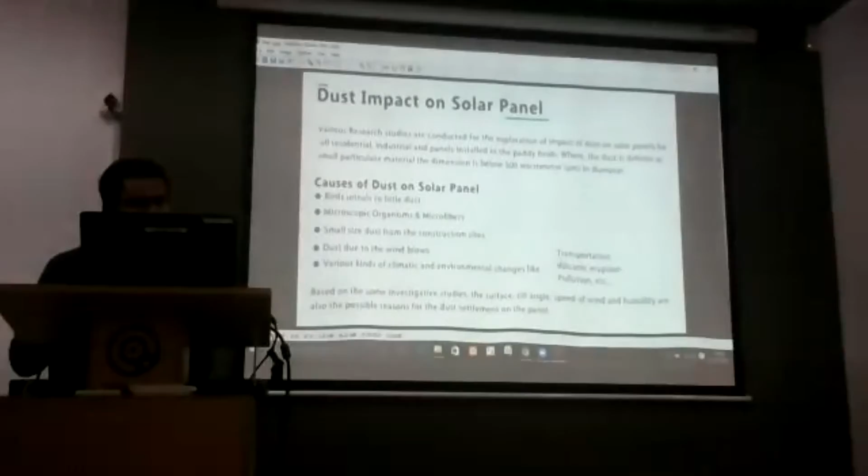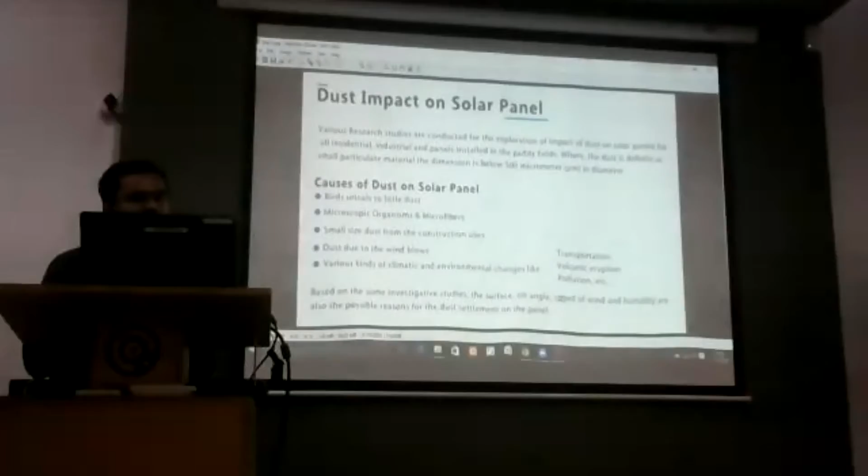These are some of the reasons for the impact on solar, like water sufficiency and transportation. As we all know, it's mostly about these needs. So the dust particles settle on the solar panels, creating a disturbance in the efficiency obtained from the solar panel.

In the proposed recent studies, I have seen the performance reduction due to dust elements, not only in India but in other countries too. In our country, in my state, it is from 3% to 7.6% over a span of 45 days. The efficiency reduction is similar in the United States at 4.7%, and in Saudi Arabia and some other countries along with us.

Simply, what I am telling you is that efficiency is the most important factor in solar panels. But due to dust accumulation on the solar panel, the efficiency gets reduced, resulting in less output, and the building cost is high. So this is the variable, and the previously existing systems are self-controlled systems, meaning there is only controlling.

In the proposed system, the solar panels will be cleaned by itself. Okay, so this is the existing system.

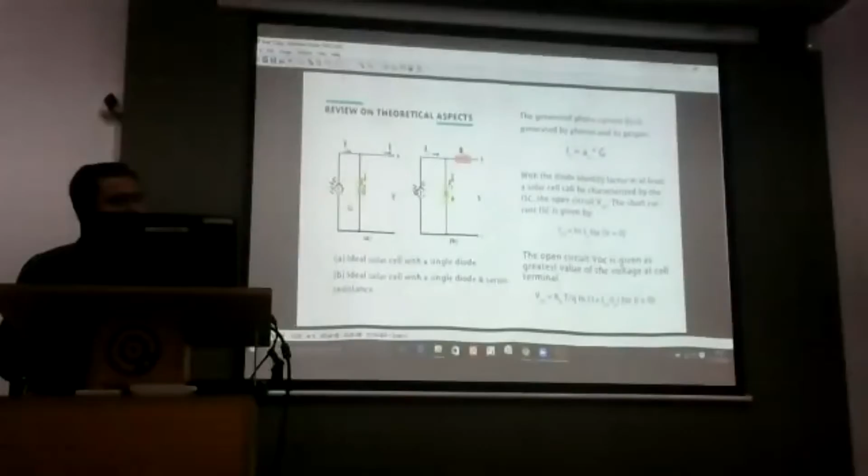So these are some theoretical aspects regarding that one: how the current and voltages will impact the panels, and how each cell will get the power. So that is regarding this point.

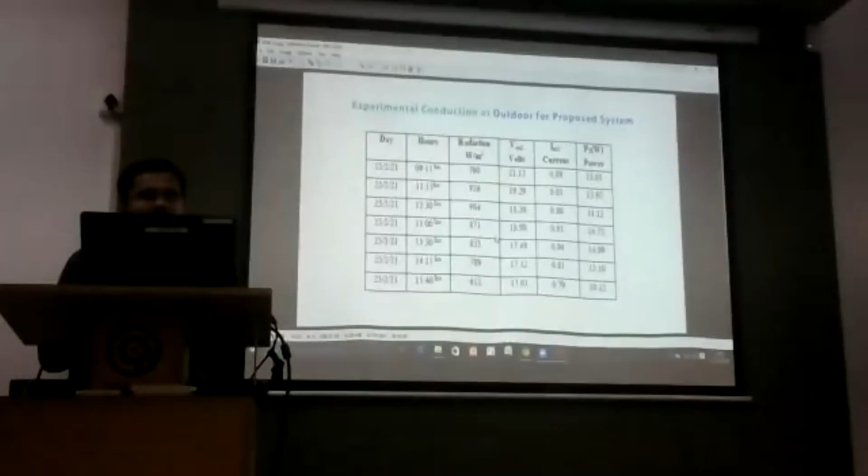Finally, we have studied this over 21 days. With existing systems, we have a power loss of 13.46, and the efficiency increased to 18 to 22% with our proposed system. So that is regarding the self-maintained solar panels as a basic one.

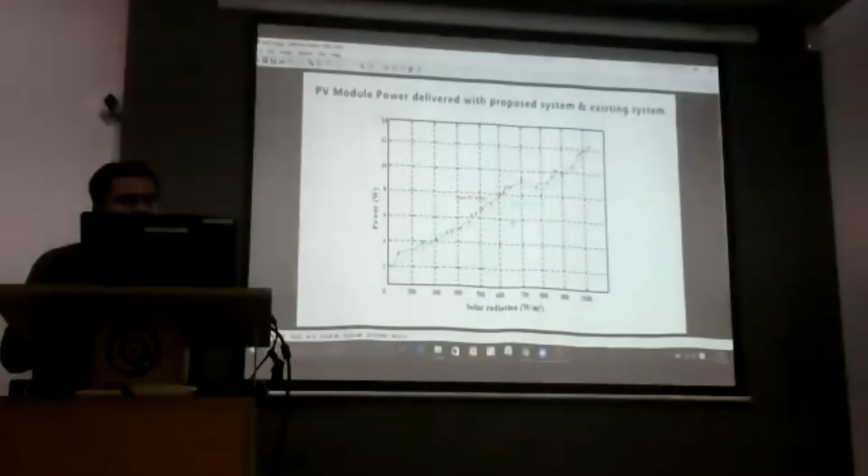This is the basic thing we have designed on our own, and the diagrams were also implemented by our team without copying from the internet. All of this is self-designed, and this is the final output we have come up with, and these are the final results we have got from the work.

This is... any doubts?

So this system is better than the conventional one. How did you make the comparison? Yes, sir.

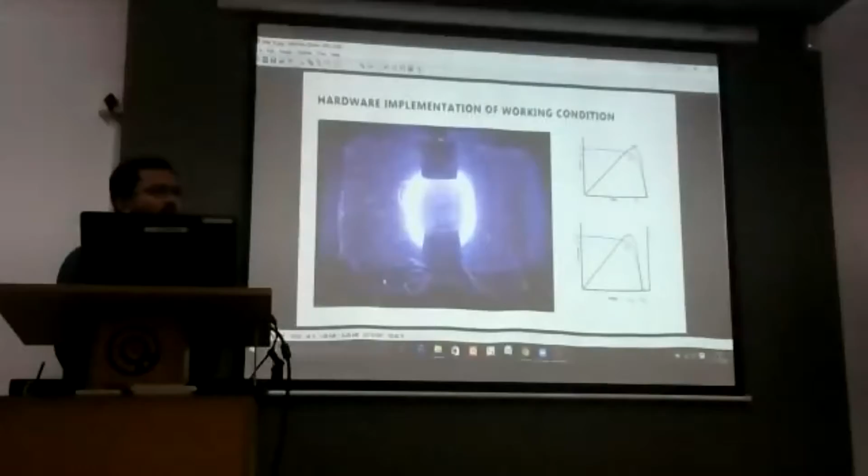We got it from 18% to 22%. That is the difference between the existing system and the proposed external system. We enhanced the efficiency, power, and current outputs. That simply means getting the maximum output from the solar panels, even across different parameters for solar and power. They are only related to the prototype, not solar directly.

What are the design parameters for this prototype? How did you design the motor? How did you select the motor? This prototype is very small due to the economic benefit.

This is a DC motor, 150 RPM, and this motor will be moved from this side. We did this using an Arduino prototype.

It is giving output for only certain days, and that will be affected by the impact of dust. I wrote the code based upon that — if the dust level crosses the limited threshold, then the slide will be moved from one end to the other.

How do you measure that, by looking at the efficiency or the intensity of the dust? Yeah, exactly, by efficiency — if the efficiency level decreases because of the dust only. So for example, if I run at 15% efficiency, and if that drops below 14.9 or 14.5, then the model will be moved.

We get that from the current and voltage system. That's why it gives mostly all those benefits. So obviously the efficiency will be disturbed because of building, wind, dust, and air.

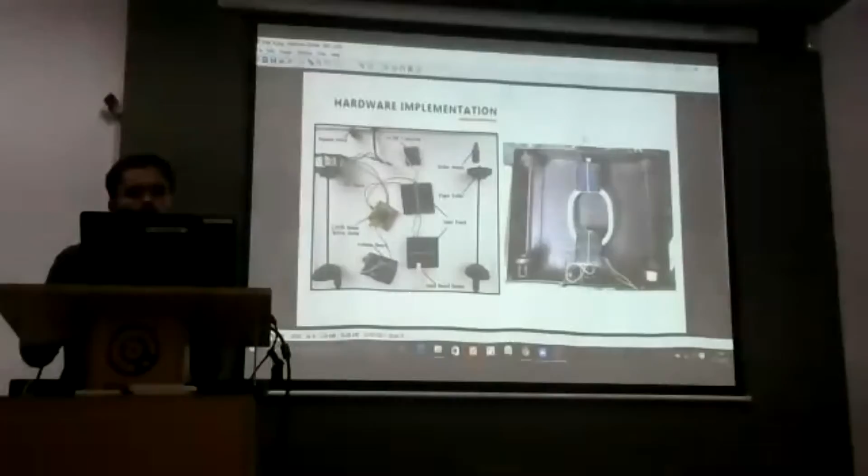By getting that alert, if we don't clean it, the system will get the alert and it will be cleaned from this side. But you need to hold this side and the other side, meaning to hold the covers. There is a sheet over it, so that's why we wrote that we have to cover the panel.

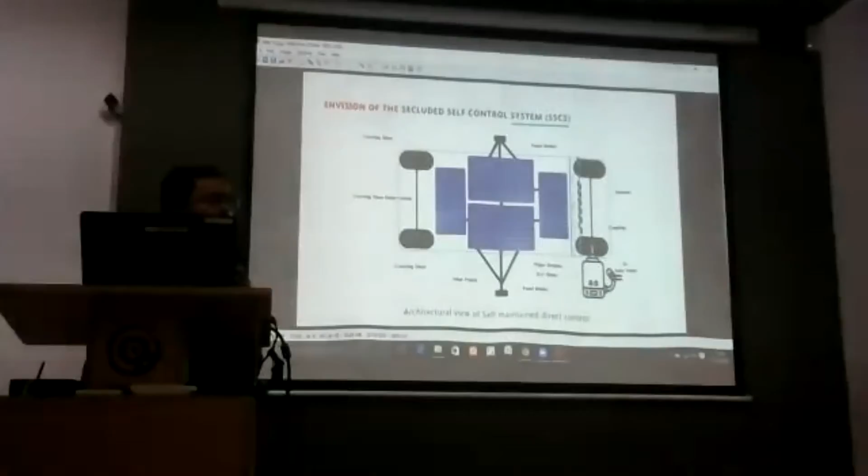And the wheel has to move itself. If we cover the panel, then the rod will move straight. We have the brushes here, sir, you can see here.

This will be rotated over, sir, from this angle to this angle. Meaning it's zero, and you take it as this angle, and it moves right to left and left to right. We are simply directing the motor directions.

That's it, and the cover is over there, and it will go from one end to the other. This is powered by the same solar panel — the power for the motor comes from the solar panel. Yes, sir, exactly, we can use that one.

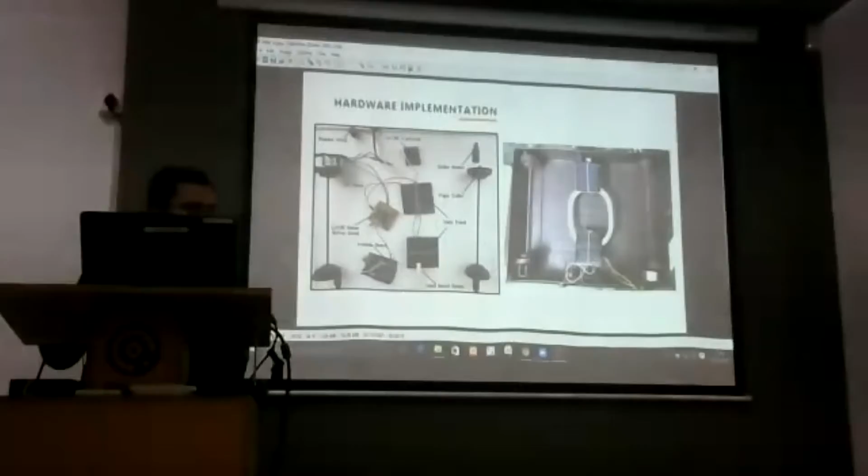Okay, so the power will be given to these motors. And this converter is used for the external motors, for irrigation purpose motors.

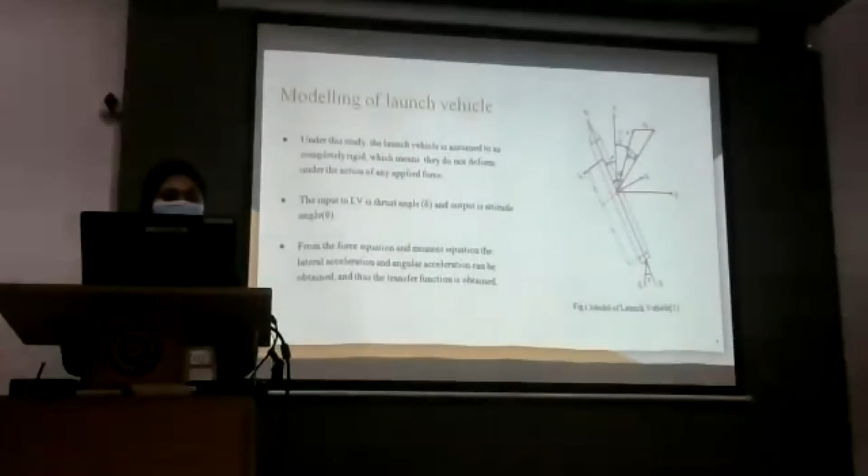The input to the launch vehicle is thrust angle delta, and the output is attitude angle. From the force equation and moment equation, the lateral acceleration and angular acceleration can be obtained, given in equation 1 and 2.

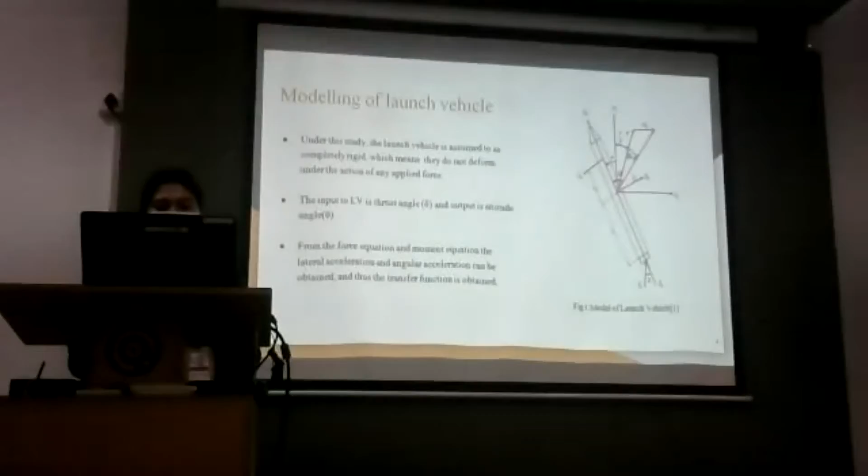From the figure, we can see that angle of attack alpha is theta plus z-dot by v plus alpha w. Then z-dot by v and alpha w are the components of the wind, and those components can be neglected, as given in equation 4.

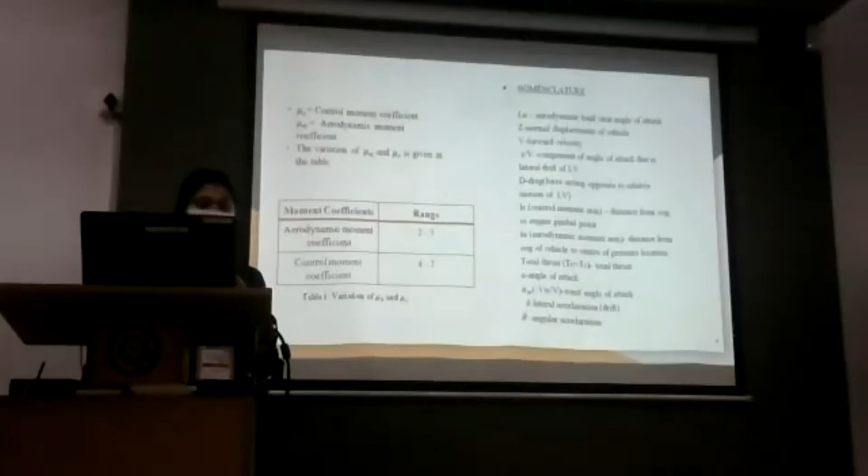Taking the Laplace transform and combining with equation 5, we get the transfer function of the system theta of s by delta, equal to mu c by s squared minus mu alpha, given in equation 7, where mu c is the control moment coefficient and mu alpha is the aerodynamic moment coefficient. The range of mu c and mu alpha is given in the table.

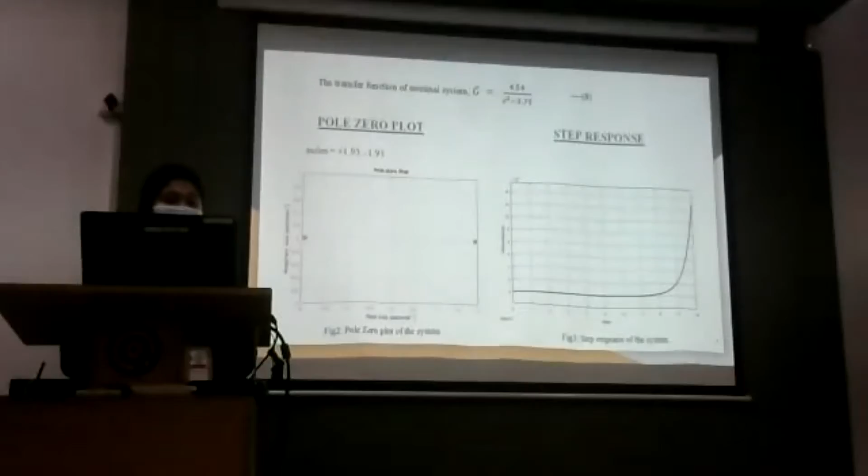Equation 8 shows the nominal transfer function of the nominal plant. Figure 2 and figure 3 represent the pole-zero plot and step response of the system. From the figure, we can see that our system is unstable.

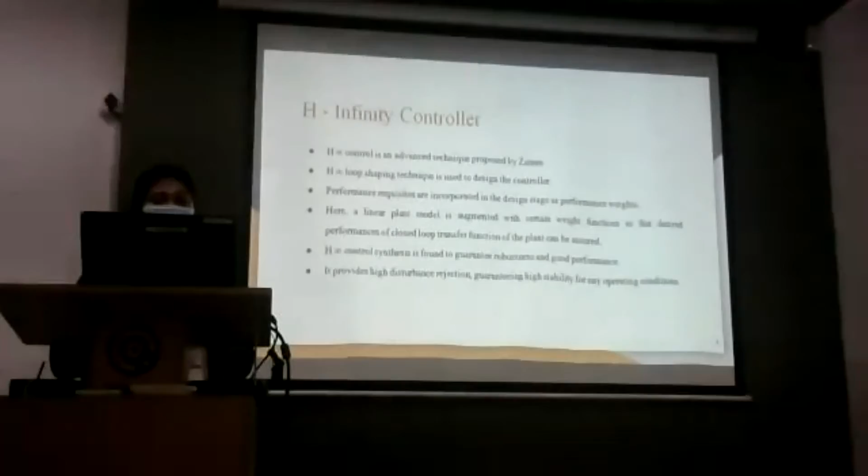So here we are designing an H-infinity controller. It is the most advanced technique and was proposed by Zames. Among different methods, we are using the H-infinity loop shaping technique for design. We are adding performance weight in the design stage to get our desired performance.

Coming to the design of the H-infinity controller, first we have obtained the plant transfer function. Next, we check the stability criteria as well as performance criteria.

The stability criteria states that the roots of the characteristic equation 1 plus G(s)K(s) equal to 0 should lie on the left half of the s-plane, and the performance criteria states that for all frequencies where the disturbance is high, our sensitivity function should be small.

Here we consider two transfer functions: one is our sensitivity function S and complementary sensitivity function T, given in equations 9 and 10. Our sensitivity function is the ratio of output to the disturbance, and the complementary sensitivity function is the ratio of output to our input.

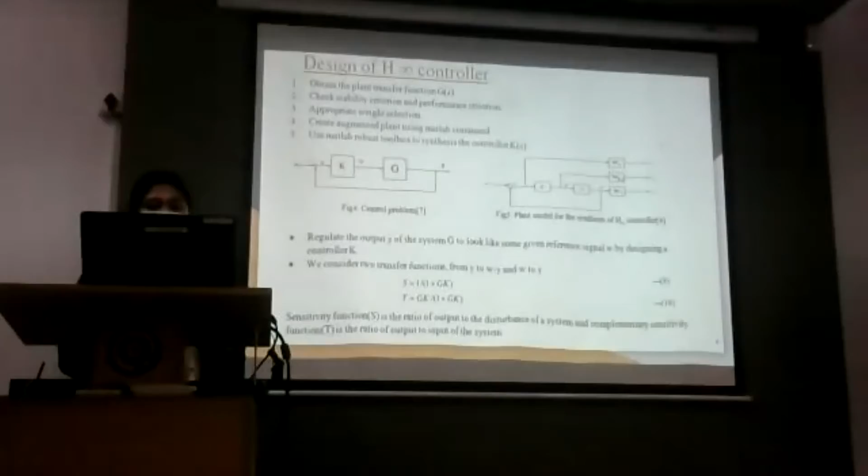Selection of the weight is the most important design in our project. Selection of weight for a robust controller is intended to reduce the H-infinity norm of the system. For that, we are introducing 3 weights to the system: WS, WKS and WT. WS is the performance weight, WT is the robustness weight, and WKS is the weight which is a constant.

It is used to limit our control. WS limits our sensitivity function and WT limits our complementary sensitivity function.

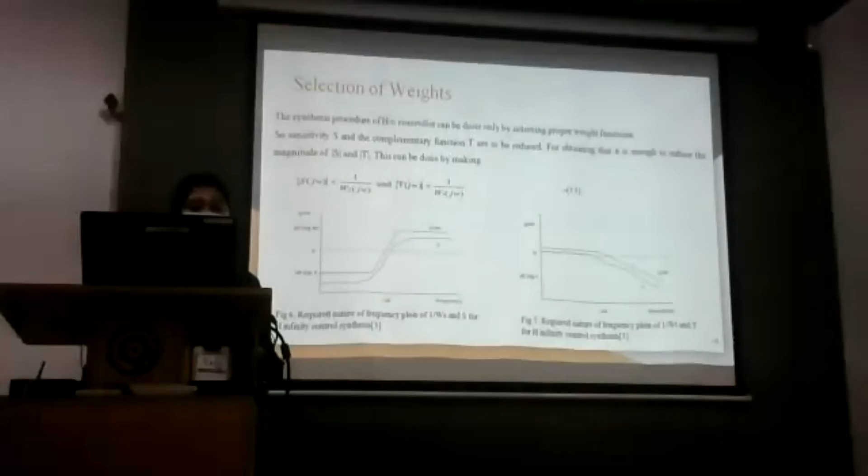For selecting the weights, there are no hard and fast rules. We are doing this by reducing our sensitivity function and complementary sensitivity function. To obtain this, we simply reduce the magnitude S and T such that it satisfies the equation 11. Figure 6 and figure 7 represent the graph, showing a graphical representation of the equation level.

The weight functions are nothing but lead-lag compensators, and equation 12 and 13 are the empirical formulas used to determine the weights.

As I said earlier, there are no hard and fast rules for finding the weights. Either we can use the trial and error method, or what we have done is the automatic weight selection algorithm, which is used for our given system.

The input to the algorithm was our plant transfer function, and we initialize the values of A, M, and L as 1, 0.1, and 0.0. Then we found out our WS and WT. Then, using the MATLAB command, we find the augmented plant P and the controller K.

Next, we have to check whether our cost function gamma is less than 1. If it is not less than 1, then we have to make necessary changes, adjust the values of A, M, and L, and repeat the previous steps.

If it is less than 1, then we have to check whether our equation 11 is satisfied, which is this. If these conditions are satisfied, then we tune our WKS, and lastly we get the optimum controller K of S.

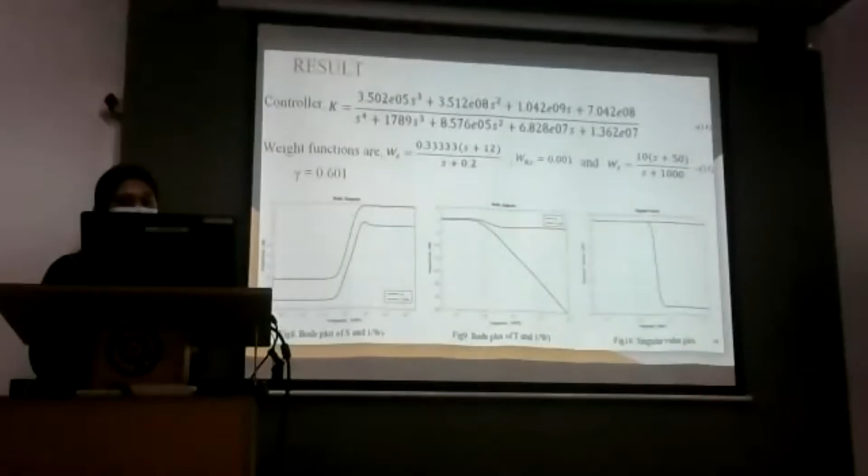Coming to the result part, equation 14 shows the transfer function of the controller, and equation 15 shows the weights that we obtained by doing the automatic weight selection algorithm.

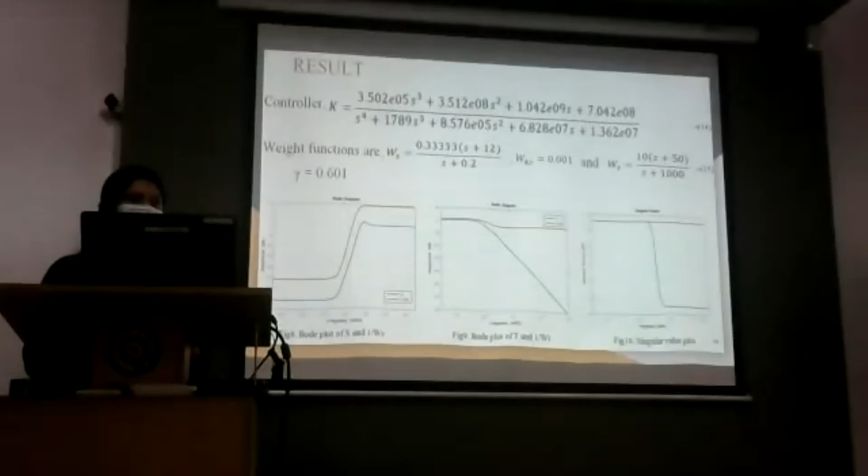Figure 8 and figure 9 show the Bode plot of S less than 1 by W and T less than 1 by W, which we can see satisfies our equation 11 and equation 10. Figure 10 shows a singular value plot of the system.

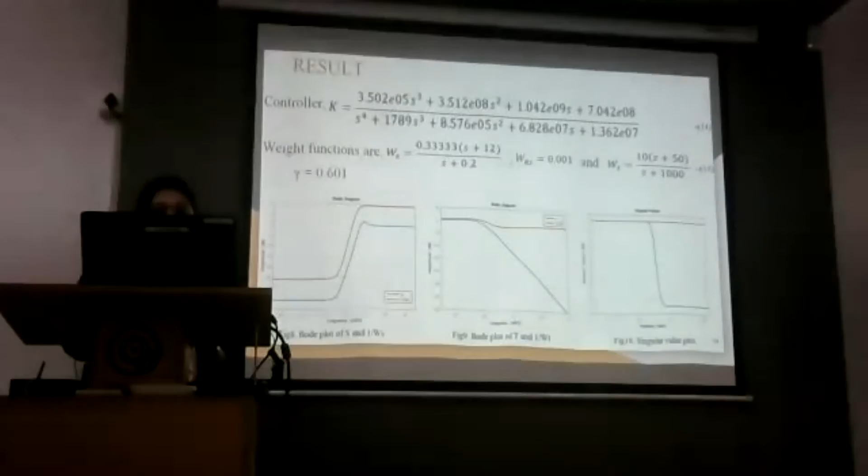The red line depicts the maximum singular value. So from the figure, we can say that all other singular values are below our maximum singular value.

Coming to the results, our main objective was to get a response with overshoot less than 25% and a rise time less than 1.5 seconds. Figure 11 shows the step response of the system with the controller, which satisfies our desired criteria.

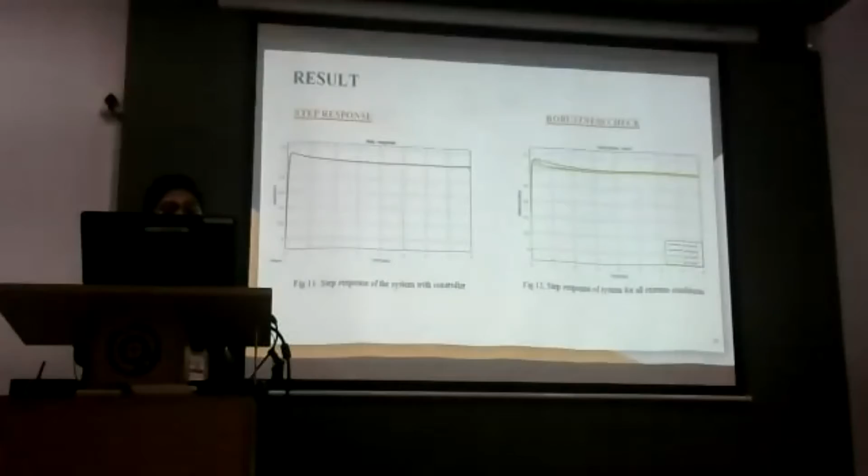Next, with the values of table 1, we have done the robustness check, and with all the 4 extreme limits also, we could say that our system with the controller was satisfied. Our result was satisfied.

So first we started with the rigid body dynamics of the launch vehicle, and we obtained the transfer function. From the pole-zero plot, we could see the system was unstable.

To stabilize the system, we introduced an H-infinity controller using the automatic weight selection algorithm, and also we did a robustness check and disturbance check. From the simulation results, our time domain specifications were met, and the disturbance rejection property of the H-infinity controller was good.

So your entire research is based on the assumption that the plant is linear. We are talking about a launch vehicle and how far it is close to reality.

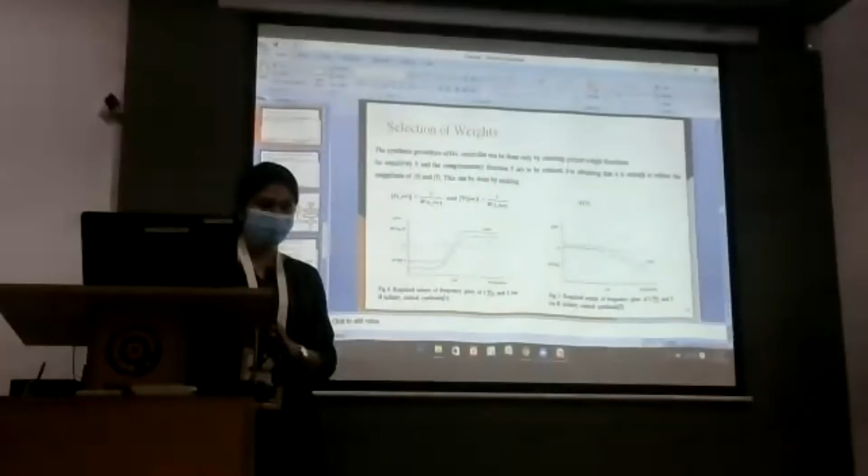So what is the M, A, and L? These are the variables in equations 12 and 13. M was a high frequency disturbance gain, A was a low frequency control system gain, and L was a constant. So what is the relevance of that high frequency disturbance and low frequency control system? Maybe the control system is really good, right?

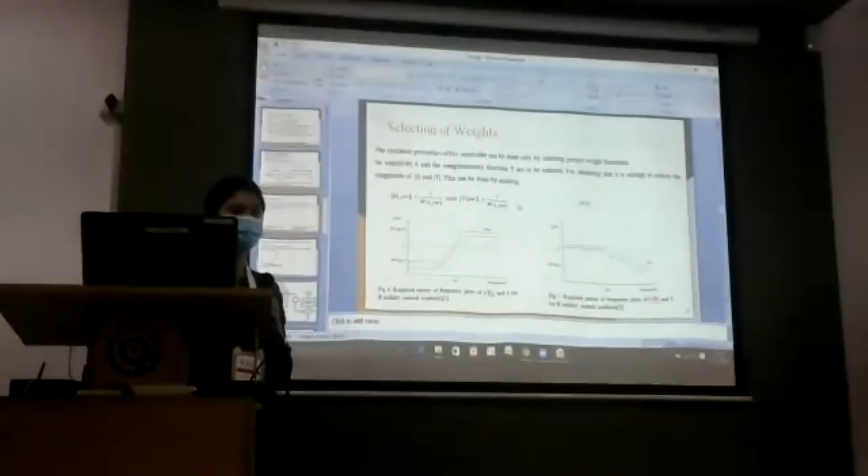Now, coming to the most important part of the discussion: robustness. What do you mean by robustness? Robustness says that not only for the nominal plant, but also for neighboring values, the controller would be stable and would attain our desired output.

Nearby values means, to be more specific, you might be putting delta M plus delta N. Here we have given the info using plus 2 to 5 and 4 to 7. These values are taken from the paper, so we just check whether in this range, if we put any of these values apart from the nominal one.

So you have considered the system parameters of yours. Have you not considered any disturbance? We only consider the coefficients, where we neglect all the other results like wind and other effects.

Because by classifying, you're obviously supposed to put the uncertainty part, right? Uncertainty part of your system dynamics. I didn't find that in your presentation, and if you do not have the uncertainty part, then how can you talk about robustness?

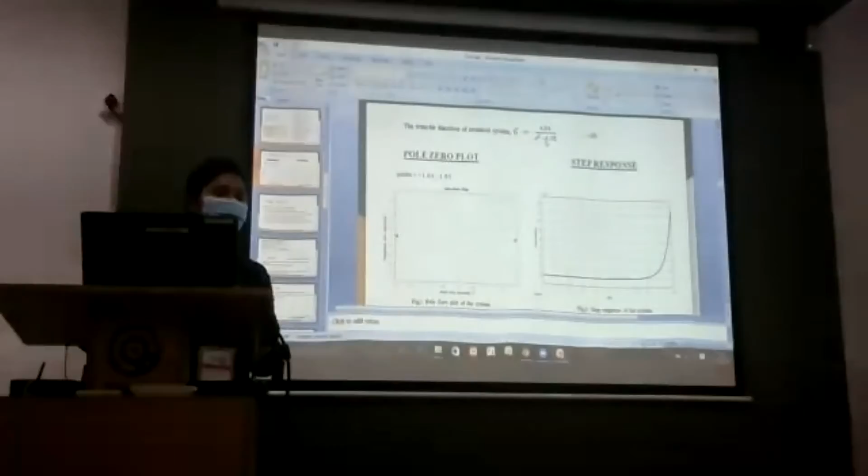These values they take from the paper, which most papers use as a nominal plant, so they also define the range.

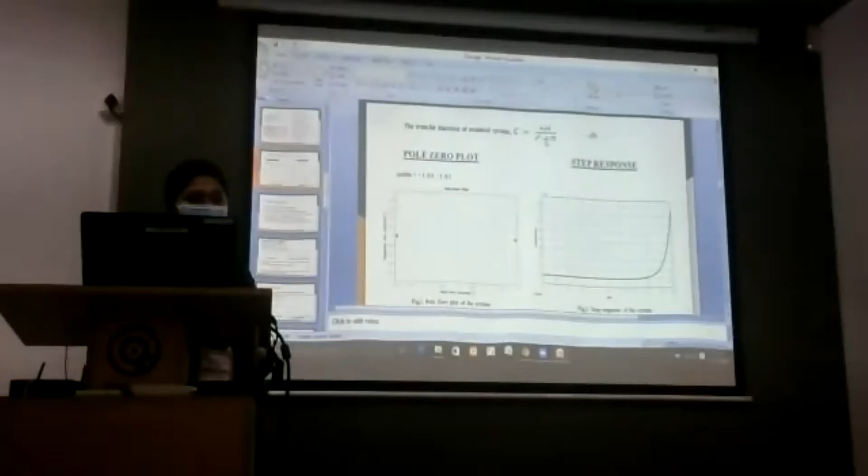So the nominal plant we took of these values, and we check whether you subtracted 2 from 4.54, how do you check the output? No, we just gave the extreme limits, 2, 5, 4, and 7, to get that.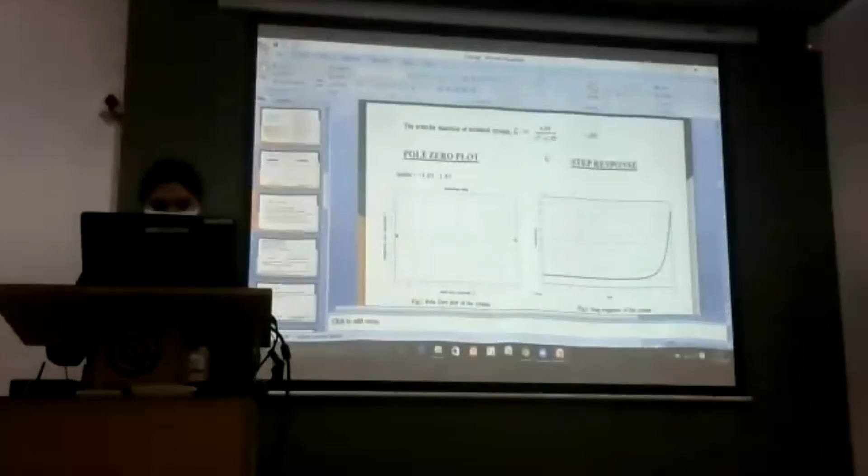So that is some disturbance signal, right? Yes, this one is a step response. First one is a step, and second one we have given... what do you mean step test? That is not step response. Initially your plant is settling around the point, and suddenly you are doing a step.

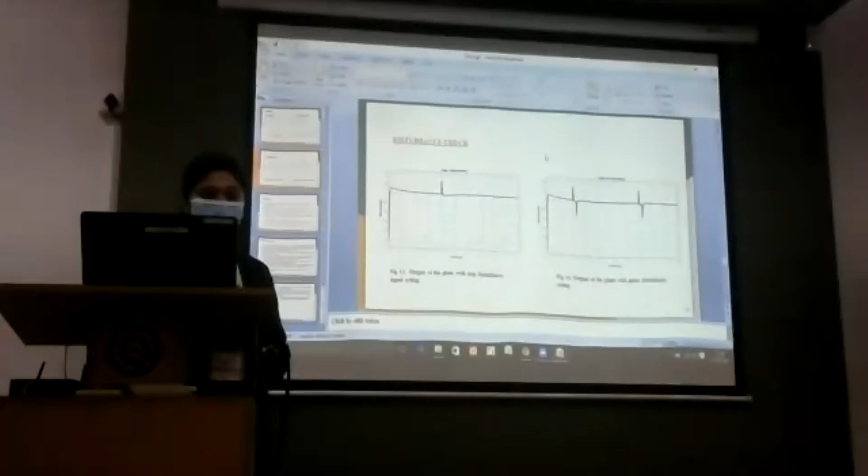So even a step of how much, 1.3? Yeah, the input plus our disturbance is 0.3, so 1.3. So the disturbance step means how much, 1.3? Suppose the same thing is going to be an impulse response of 0.3 magnitude. What modification will the picture have? Each is a step input, but you are giving an impulse input of the same magnitude. Yeah, you are giving an impulse disturbance. Right, but that is a disturbance.

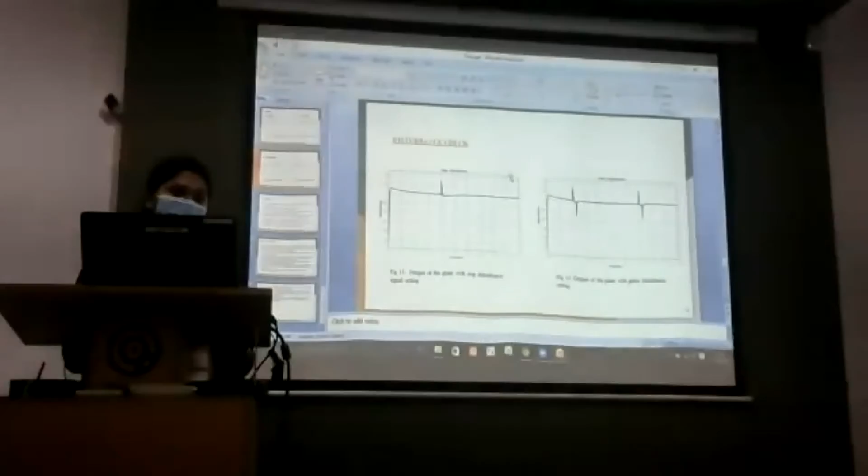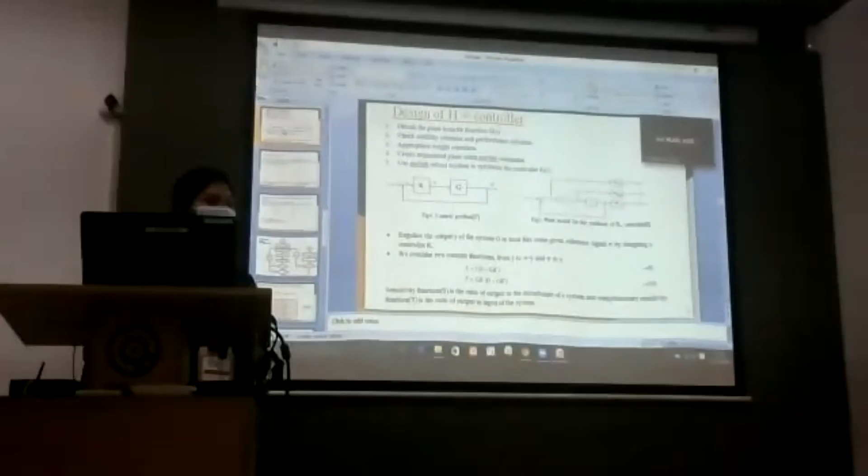Yeah, okay, then how did you arrive at the weighting function? In your design process, how did you arrive at the weighting functions? How did you choose the weighting functions? We did an automatic weight selection algorithm.

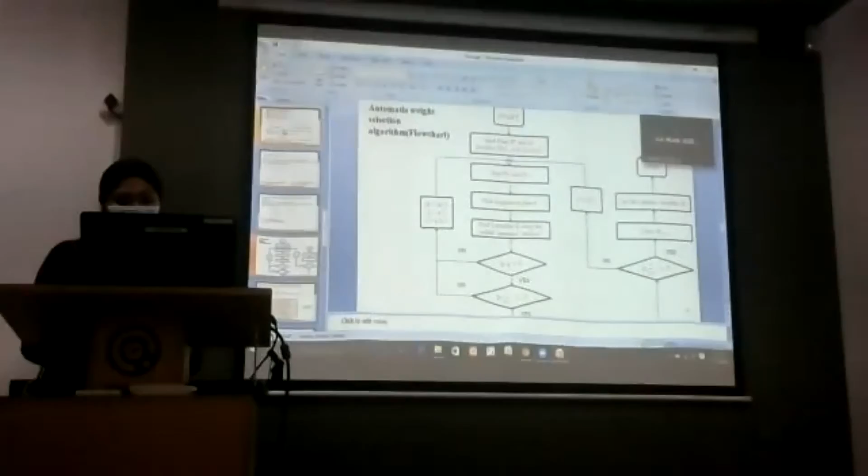Okay, and your controller is, I think, a fourth order controller you are using. Finally, you are arriving at a fourth order controller. Any plan for model order reduction? Yes, have you done that? Actually, no, we are getting a fourth order controller.

It's actually a small drawback of the H infinity controller too. Initially the plant order was 2, and we get a fourth order controller. But you can do the order reduction, right? Yes, the order can be reduced, using a hybrid controller I think we can reduce the order.

And any plan for the implementation of the H infinity controller? We are looking forward; we are all working, our team members are working, so if we get a chance, then we will implement it.

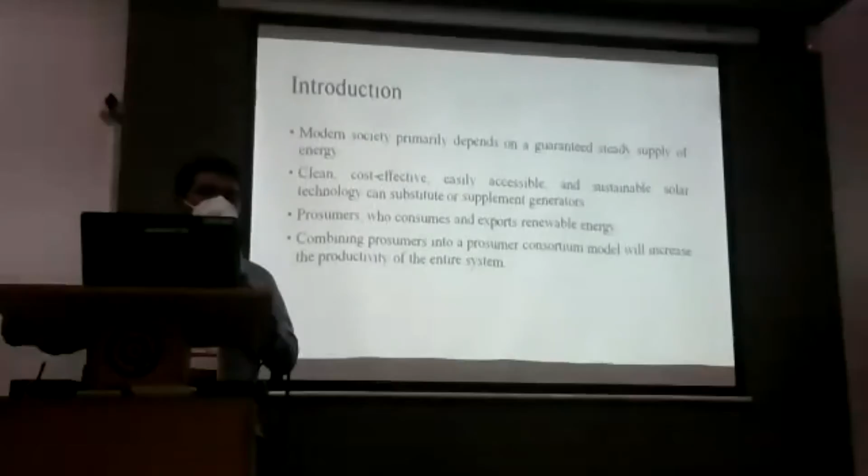Introduction: we all are in need of guarantee and secure power supply. We know that fossil fuels, which were used at a high percentage, are getting reduced these days, and we are depending on renewable energy resources. The most available renewable energy resource is solar and wind, and I am focusing on the solar case.

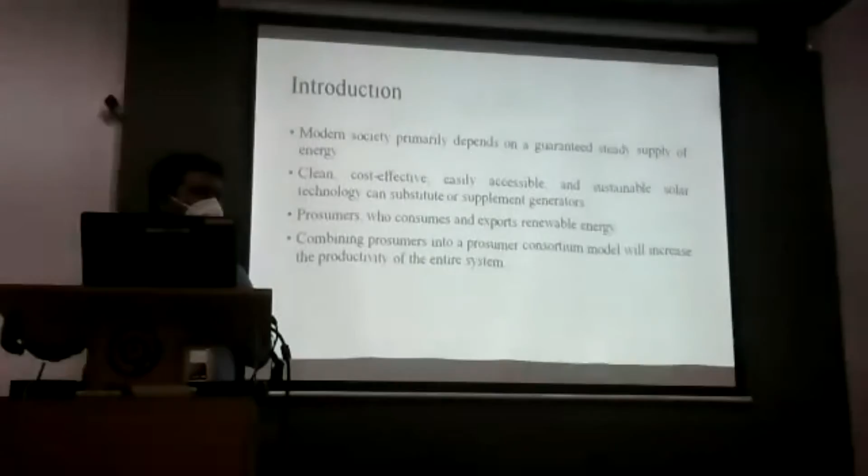While considering renewable energies, if a lot of people are using them, especially in the solar case, I am considering the prosumer. Prosumers are persons who produce and utilize energy, and they sell the energy either to the grid or to other persons.

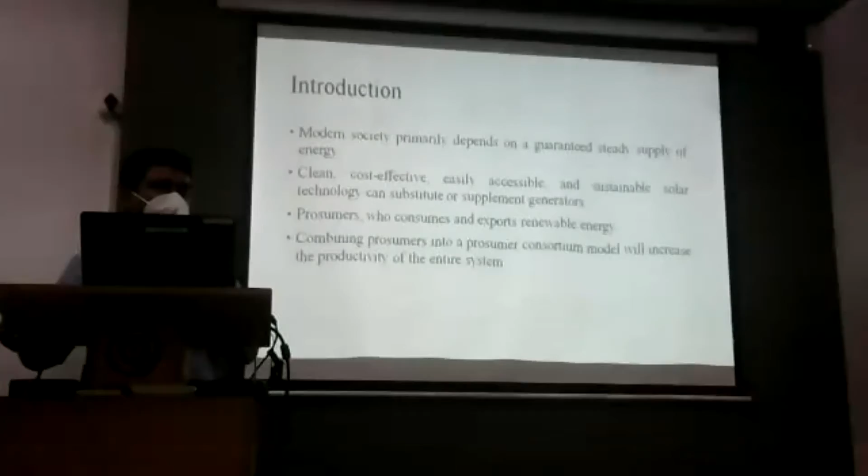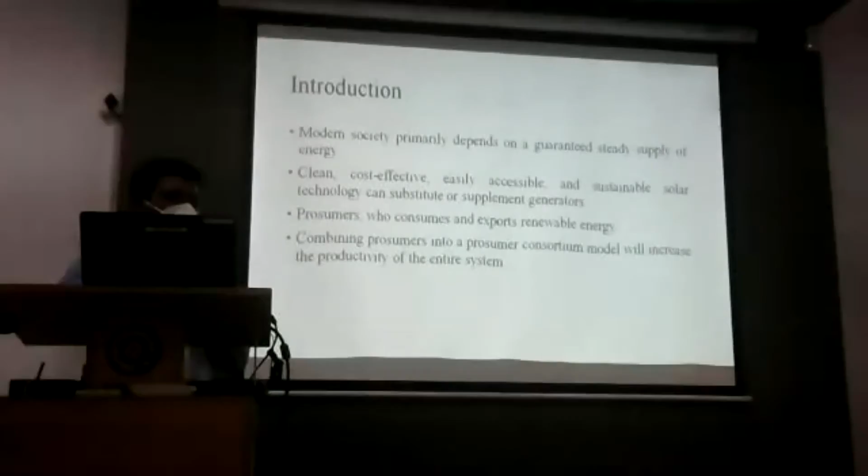So what I'm doing is combining these prosumers, known as a prosumer consortium model. This will increase the productivity of the entire system, and the availability of energy will always be at a good percentage, with no interruption to the process. That is the main advantage of this prosumer consortium.

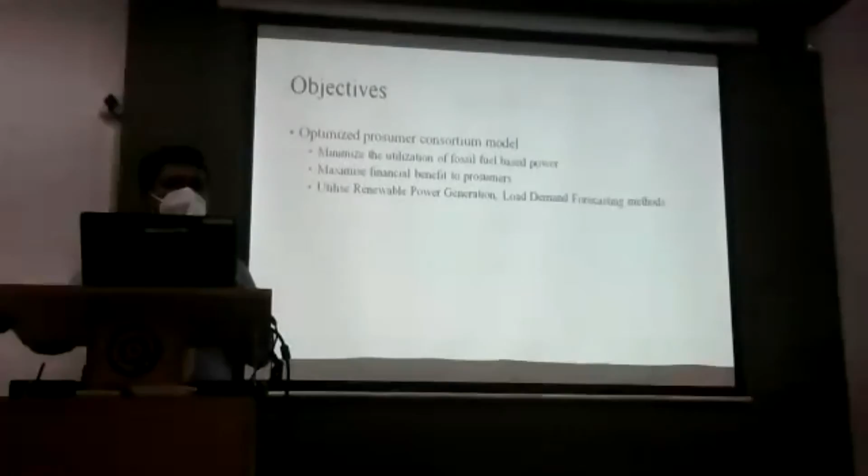The objective I consider is to minimize the utilization of fossil fuel-based power and maximize the financial benefits to the prosumers, utilize the maximum amount of renewable energy, and make load demand forecasting - these are my objectives.

Coming to the literature review: in a microgrid, the main elements are wind and solar. Solar and wind produce energy for huge grids and have a main role in supporting the main grid source, especially supporting critical loads which need to be in a guaranteed position.

Now, the system I considered myself has 20 prosumers, grouped into 5 clusters, and this whole system is connected to the main grid, so that if there is any need of extra energy, I can supply it. That is the main thing.

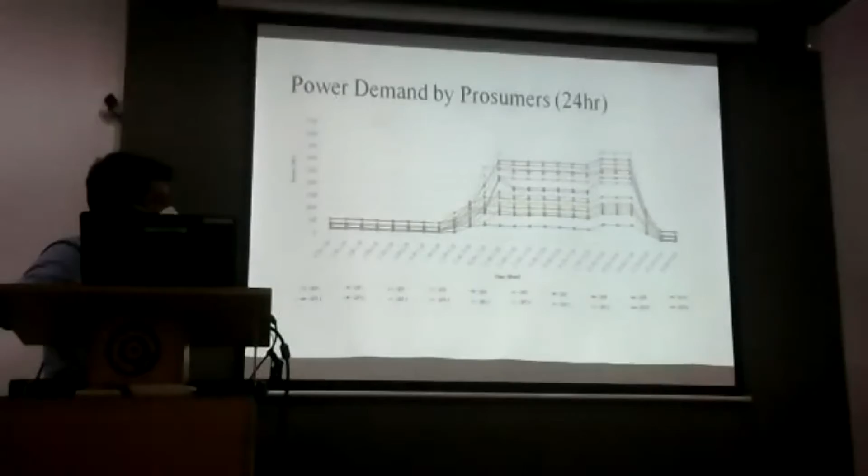The power demand is highest during the evening time, from about 6 p.m. to 9 or 10 p.m. - that's when the maximum power is needed. Still, during the daytime there will also be some amount of demand.

So for the modes of operation, as I mentioned, I consider these 20 prosumers grouped into 5 clusters, connected to each other in one mode and not connected in the other. These are the 2 modes of operation I consider. The first mode, where clusters are not connected to each other, I named the prosumer model. The second, where all communities are connected, I named the prosumer consortium - consortium meaning combining many.

And the system model: here the main thing I consider is the demand - how much demand is needed at my place, and that demand should be able to be met with the help of the power generator and the power grid.

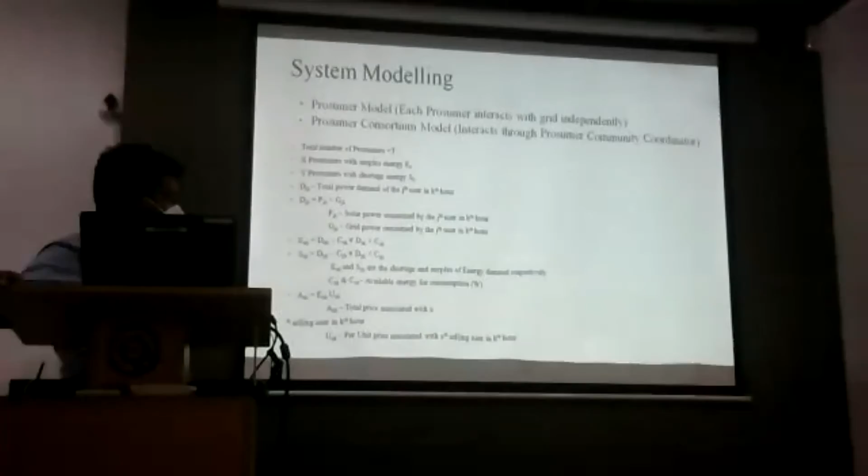This is the only way I can get the power for demand. Prosumers who have surplus energy can transfer their power supply as per the need, with some amount of cost. If they are in shortage and the demand is more than the available energy for consumption from the solar, they can take from the grid also. This is the system I considered. If a consumer supplies energy to another person, he will get a price per unit according to the amount of energy.

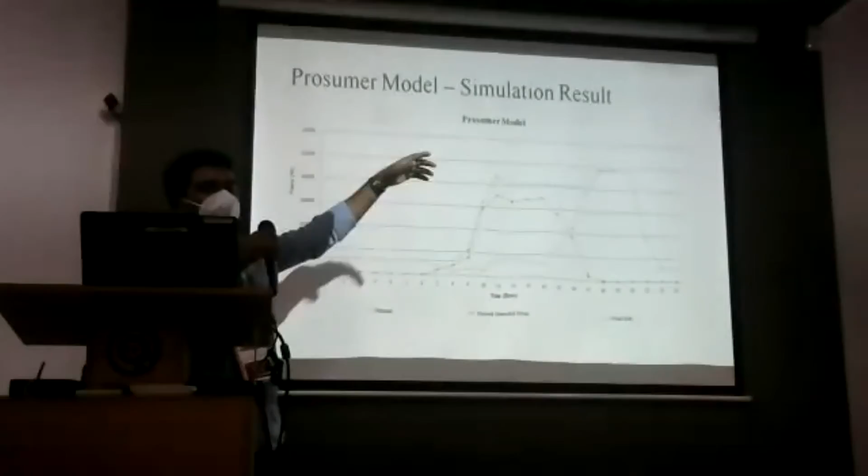This is the simulation result I did in Python. In the prosumer model, from 9 a.m. to say 5 p.m., there is power generation, shown in this color as generated power, and the demand is increased from 6 p.m. onwards. In the prosumer model, these clusters are not getting connected to each other. So the surplus energy some clusters are having, they are not giving to the other person, while some clusters will be in need of more energy and will take it from the grid. So in the prosumer model, they are mainly depending upon the grid energy instead of sharing it.

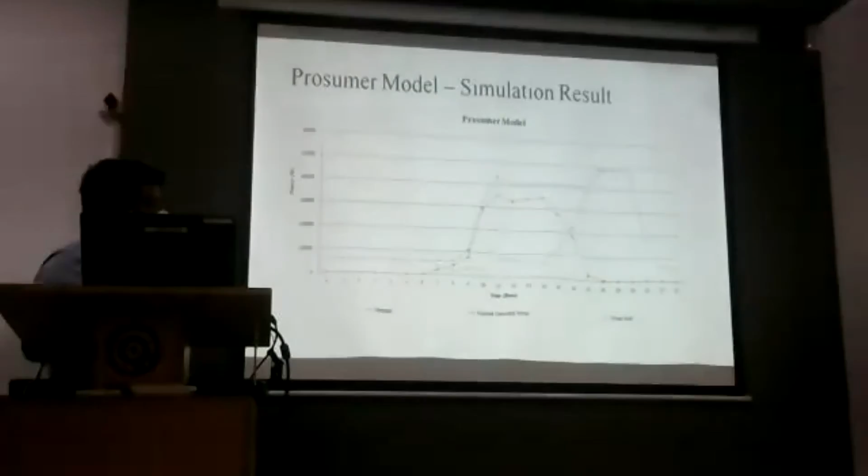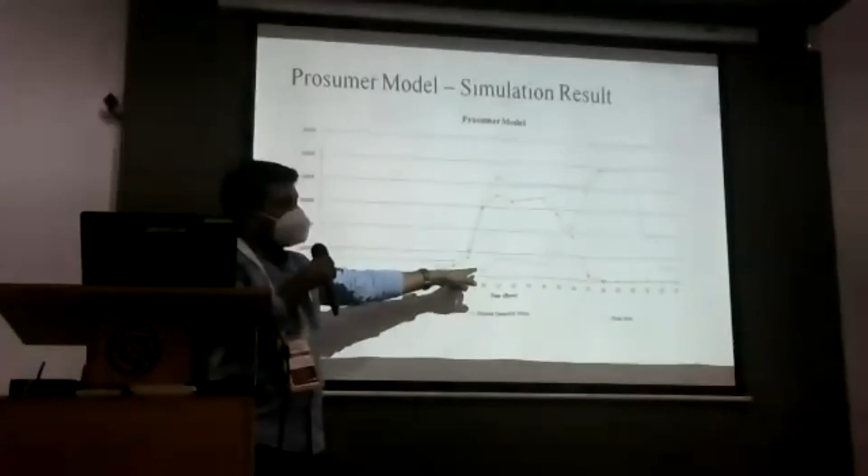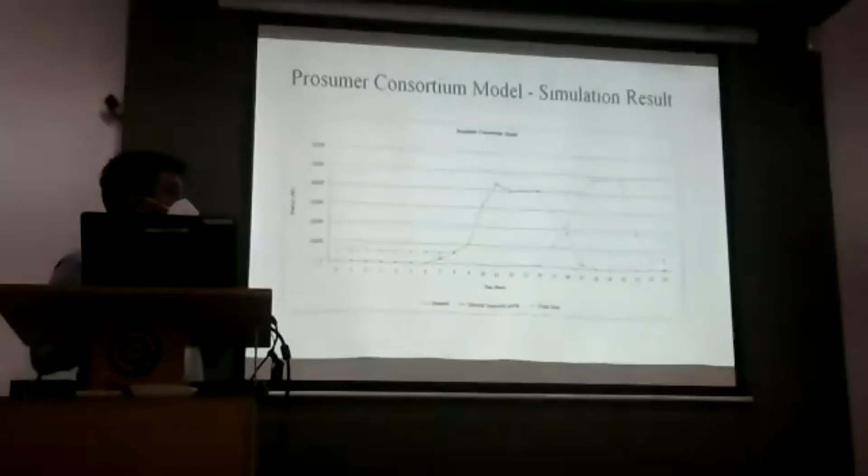But when I consider the prosumer consortium model, you can see here that in the previous case the power is taken from the grid because it's not being shared. In the second mode, you can see the power taken from the grid is very low, because they are sharing with each other the surplus energy which each person is having.

So this is the detail I considered for one day, and the demand for each person - I consider one person for 24 hours. From 7 a.m., the demand is supplied by the solar power also. So less amount of energy is taken from the grid in the prosumer model, but in the prosumer consortium model, you can see that the generated power is utilized more.

Take the 8 a.m. case: in the first case, 4,198 watts is utilized from the power generator, but in case of prosumer consortium, the power generator utilized is 5,160. It means the balanced amount is taken from the other consumers who have extra energy available. While calculating this amount as per the regulation condition, what I got is that per day I can save up to 264 rupees 75 paise, if I utilize the prosumer consortium model compared with the prosumer model.

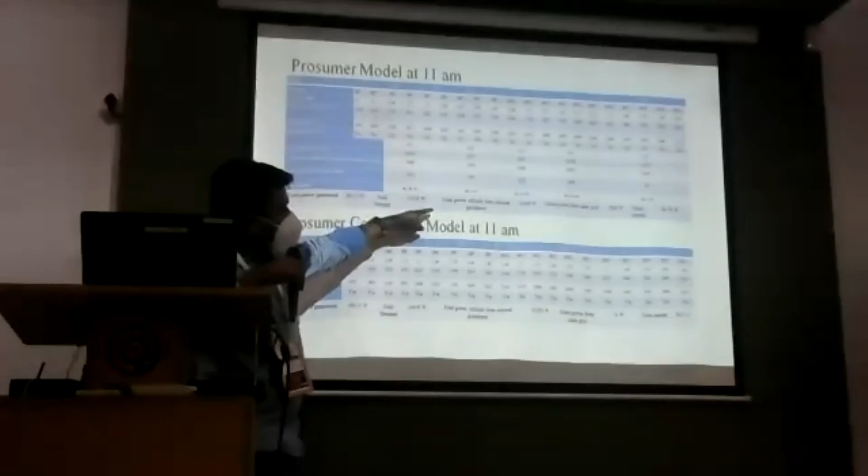So this is a case I've taken at 11 a.m., because we found that the maximum energy is produced during the noon time. So in the prosumer model, the power generated is the same, our demand is the same, but the power utilized from the consumers is only 35,469. When we consider the prosumer consortium model, the power utilized is 43,300 - this is the difference in the amount of energy utilized from the solar when the prosumer consortium model is considered. In the earlier case, the full 20 consumers are depending on 7,961 watts power from the grid, but in case of prosumer consortium model, only 71 watts is utilized.

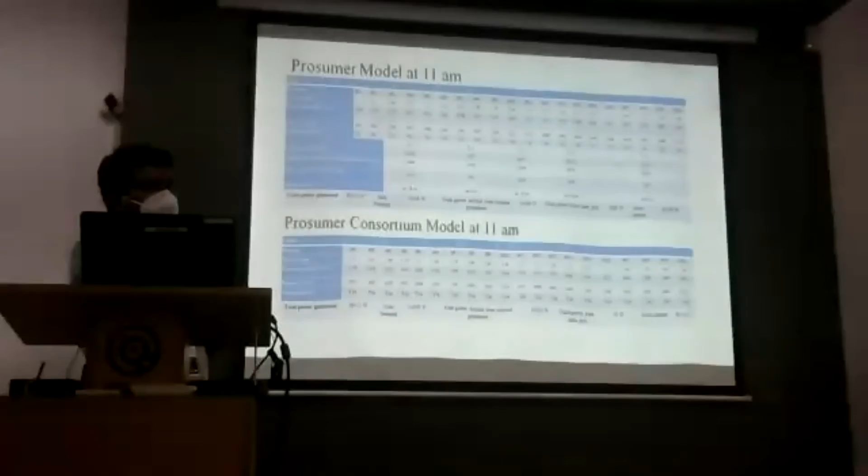This is the inference from the details I took. During 8 a.m. to say 2 p.m., the prosumer model is more dependent on the grid, but in the prosumer consortium model, the dependence is very, very low. So the conclusion is that this prosumer consortium model for optimized scheduling is done, and the financial benefit, as mentioned in the paper, is obtained. It reduces the dependency on the grid and enhances the reliability with the energy storage system also.

I'm concerned about the practical things, how it will be implemented, because there are a large number of switches between microgrids, and between microgrid and the grid. In engineering, you know that switching means you need switch gears and protection devices, which are normally installed in the substations. So all these things will now come to the consumer end. So with the large number of switching, is it practical? Is it economical? And thirdly, who will monitor all these things?

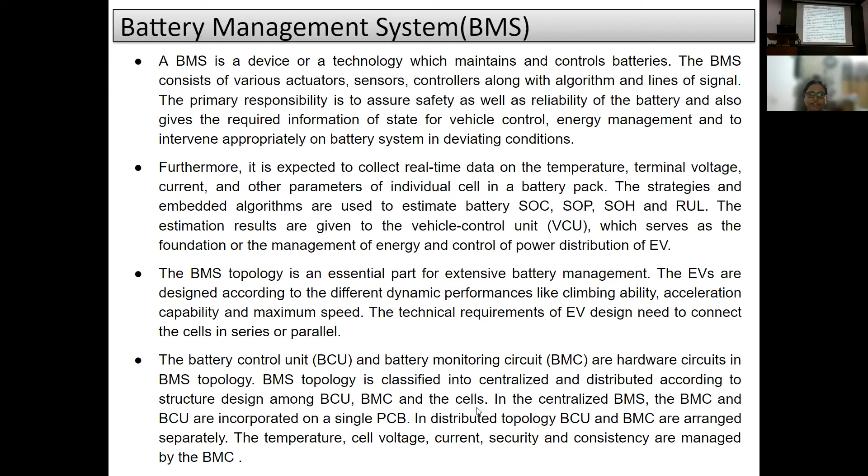The BMS topology is classified into centralized and distributed according to the structure design among the BCU, meaning the battery control unit, and battery monitoring circuit, meaning the BMC, and the cells. In centralized BMS, the BMC and BCU are incorporated in a single PCB. In distributed topology, the BCU and BMC are arranged separately. The temperature, cell voltage, current, security and consistency are managed by the BMC.

These are the functions of the BMS.

First, the data collection, because the working environment of the battery in the electric vehicle is very complicated, the EV needs to adapt to the complex and changing environment. The battery needs to operate in a complex and variable humid environment all year round. In addition, as road conditions and drivers change, the battery needs to be adapted to rapidly changing loads in order to accurately obtain the working conditions.

So accurate data collection is required. Here the battery pack is there, so the batteries are connected in parallel and series manner, and the voltage, current, cell voltage, temperature are all real-time data given to the sampling circuit. Here the sampling circuit can use a MOSFET, which takes data and gives it to the control unit. By using this control unit, we can estimate the SOC, SOH, SOP and RUL. After that, this can be communicated with the display instrument or the vehicle controller, and the data collection is calibrated.

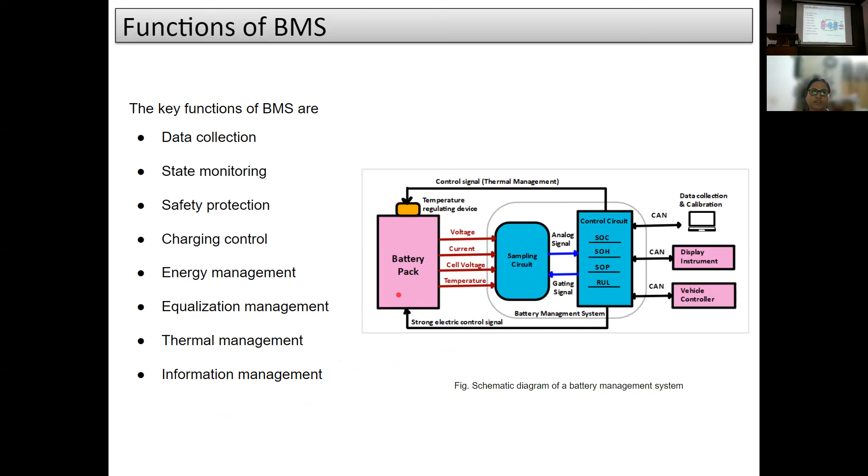Then the modeling of the lithium-ion battery. Here we are using the lithium-ion battery. Because of the complexity of the electrochemical reactions inside the battery, lithium-ion batteries are influenced by various factors and are uncertain. It is a multidisciplinary problem to establish a mathematical model of the battery, which is an unsolved challenge in industry as well as academia.

So in the BMS, the current is the input quantity, whereas the terminal voltage and temperature are output quantities, and the battery terminal voltage is separated into two parts: one is dynamic, another is static. The dynamic part incorporates the fast changing voltage component, which is the ohmic polarization, whereas the concentration and electrochemical polarization are the slow changing voltage components.

The open circuit voltage and the hysteresis voltage are the two primary components of the static part. The existing state and past inducement approach of the battery are strongly linked by the hysteresis voltage component, for designing accurate and reliable battery state estimation algorithms and to develop more accurate BMS in recent energy vehicles. Now advanced battery modeling is required.

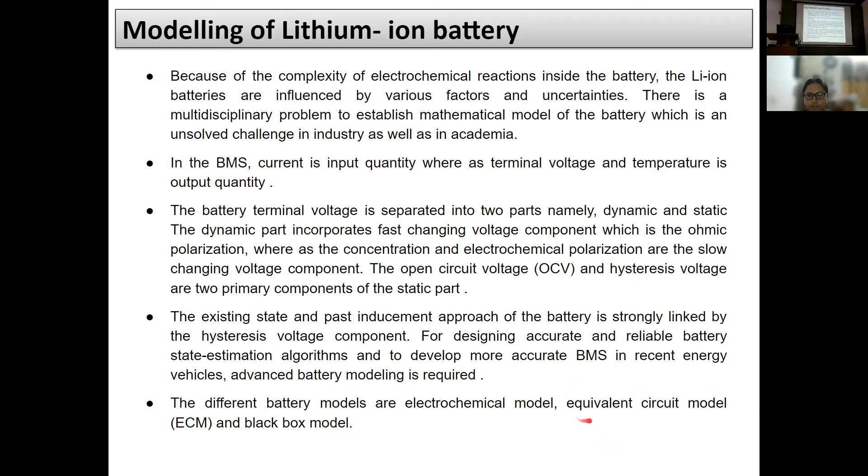The different battery models may be the electrochemical model, equivalent circuit model, and black box model. But nowadays we are using the equivalent circuit model, as it gives better results. There are different types of equivalent circuit models: one is the Rint model, another is Thevenin.